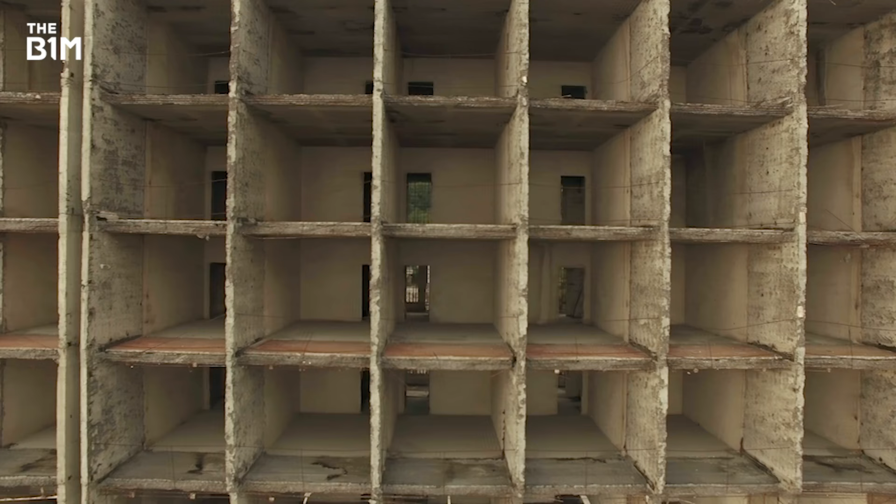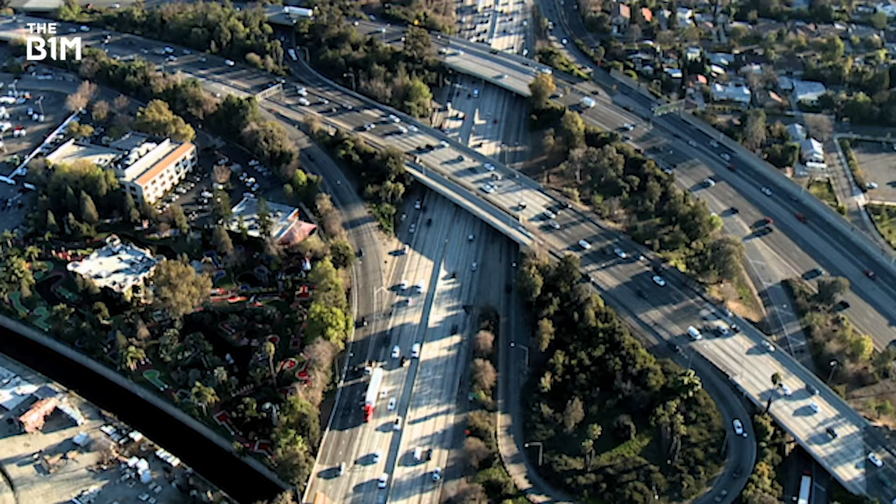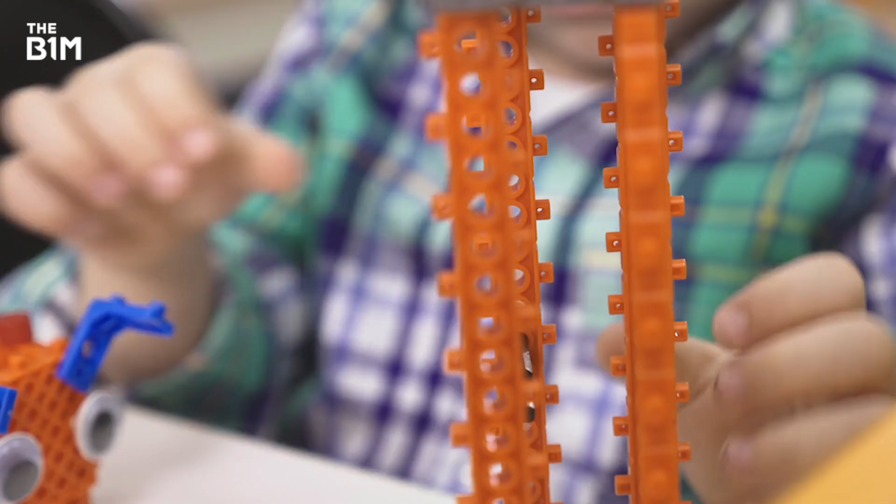The world we build impacts almost every human being on this planet. From the environments that we call home, to the way we travel, generate our energy, drive our economies, and shape our children, it is the construction sector that underpins the direction of our societies.

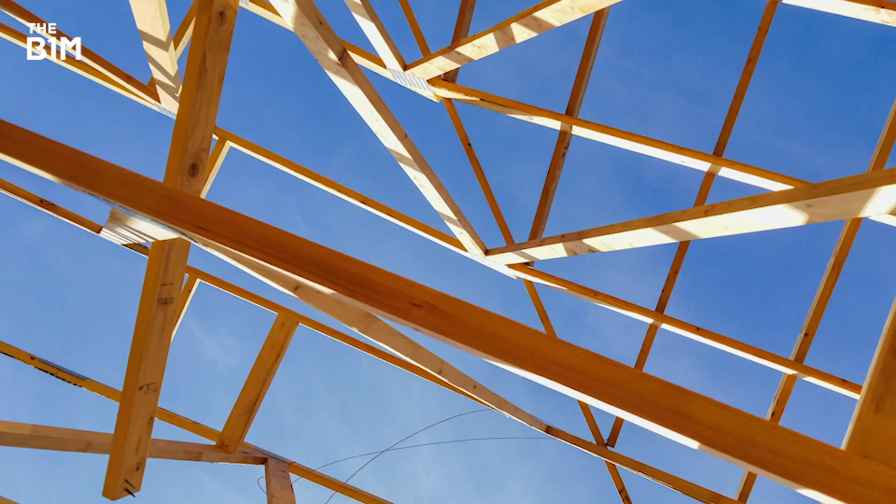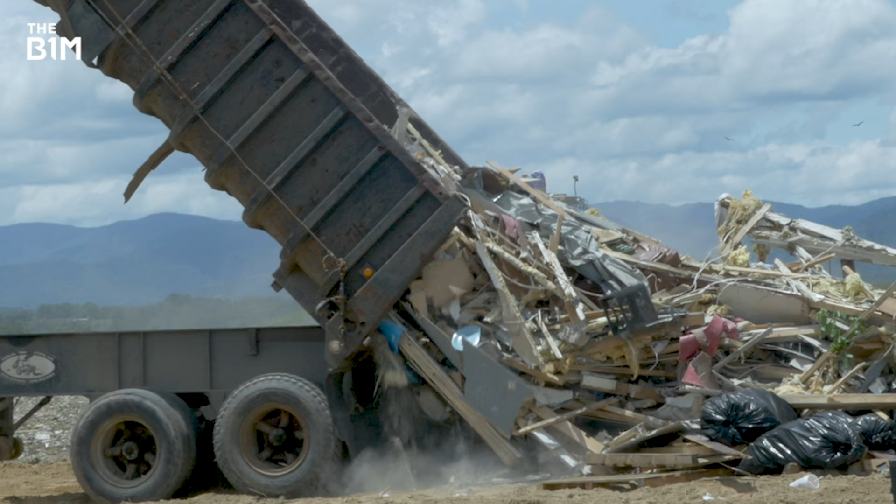But despite its fundamental impact on our way of life, our approach to construction has changed little over the ages, and we still use many of the same techniques and materials to build prototype structures in volatile outdoor environments. Now, as our planet experiences unprecedented change, the sector is embracing rapid advances in digital technologies and making a bold shift towards the world of manufacturing, merging the two to usher in a new dawn.

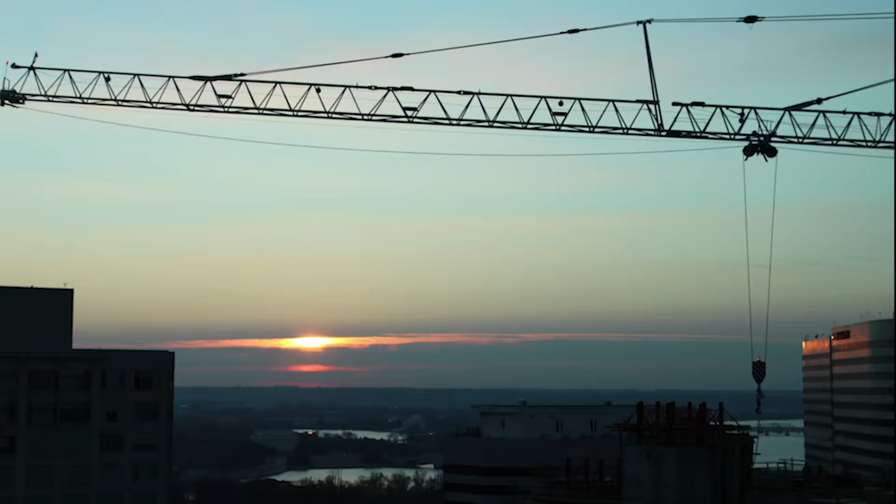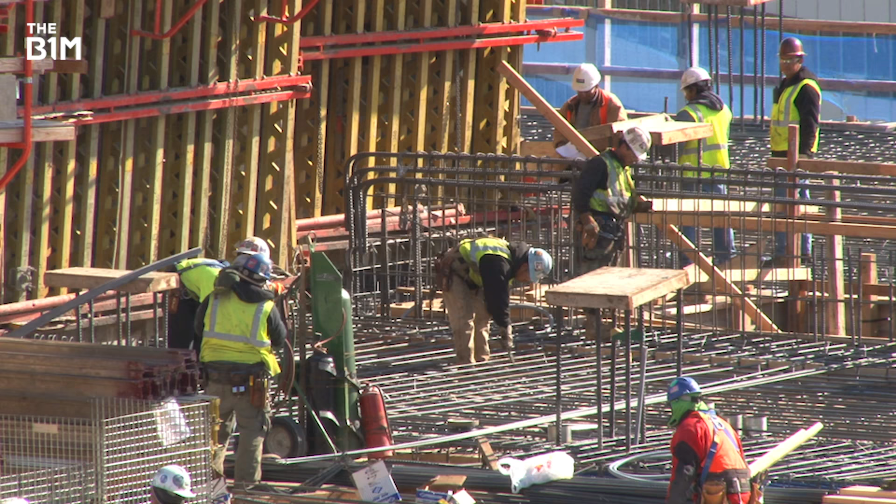For centuries, the way we construct our world has remained largely unchanged. Still using many of the same materials and processes, each project that the construction sector undertakes requires the delivery of a unique product in a unique outdoor location.

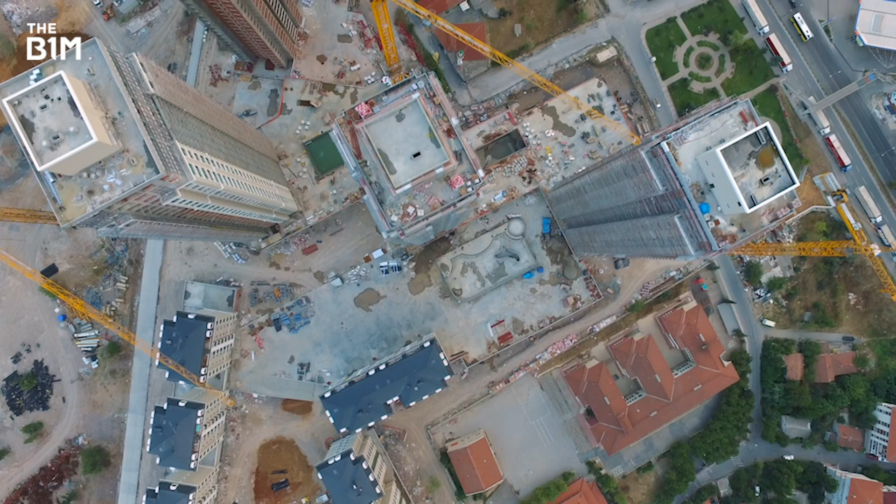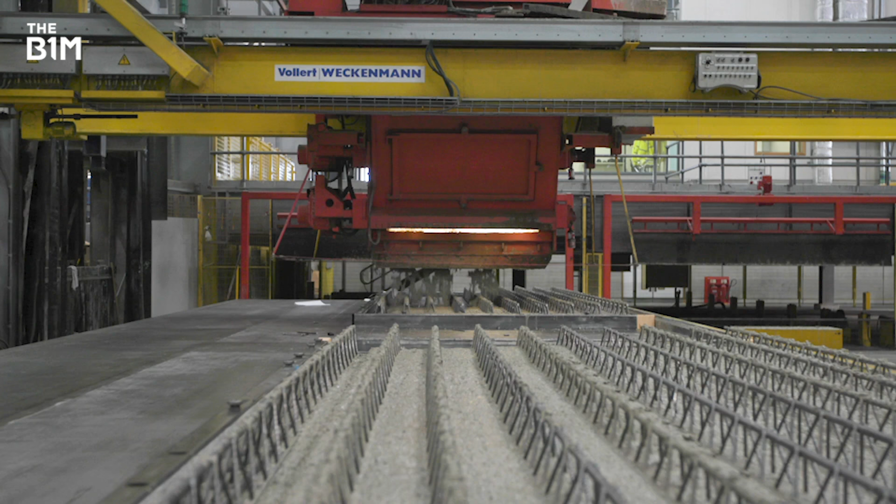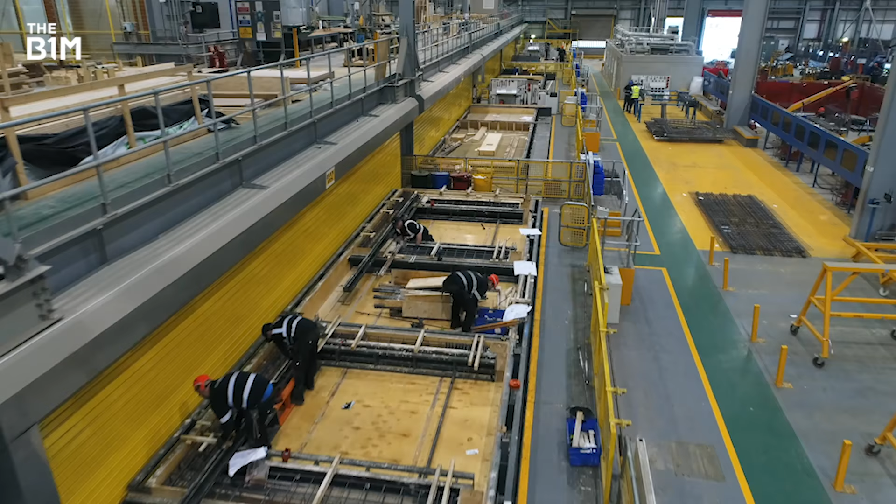Moving works away from the challenges of each site and into controlled conditions offers many benefits. Economies of scale can be achieved through automated production lines. Productivity can be significantly improved, and quality can be ensured. Such an approach also reduces the amount of time that a project is on site for, helping to lower costs, negate site-specific challenges, and to minimise disruption.

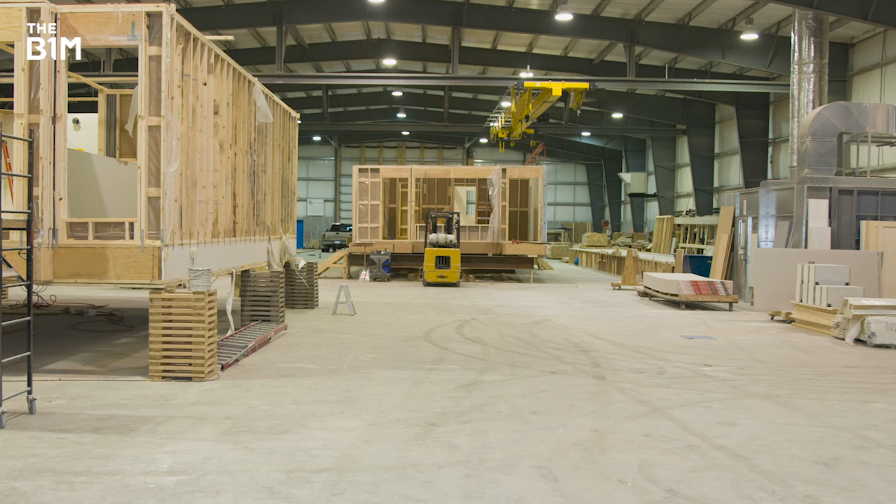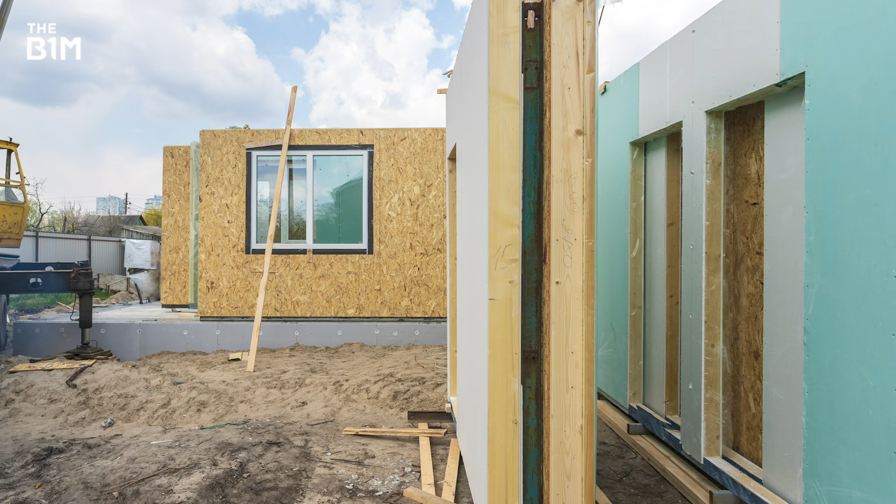The extent to which construction works are taken away from their final sites varies hugely. While volumetric solutions create entire enclosed spaces remotely and then deliver those to site for installation, non-volumetric systems are large elements of a building or structure that are prefabricated before being brought to site. On a more granular level, component-based approaches and platform systems create a kit of parts and draw from a series of predetermined items that are consistent across a number of projects.

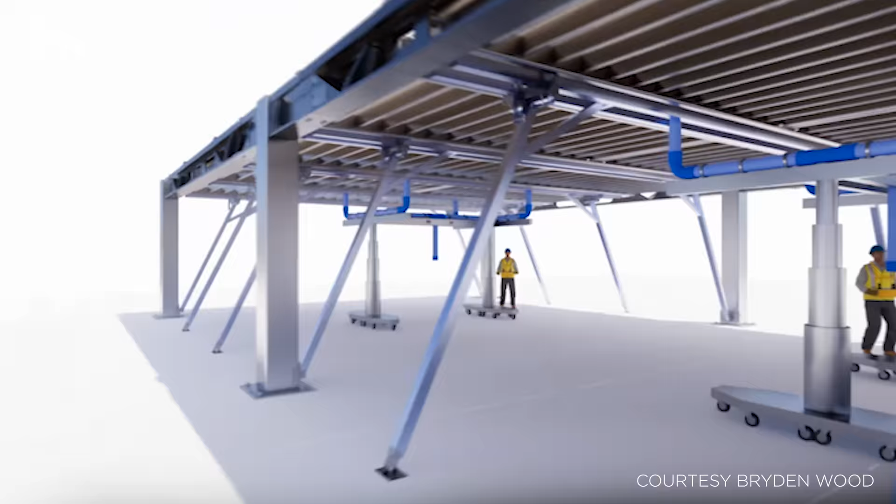Each of these off-site construction approaches offer different benefits, and each has its advantages depending on the type of project being built. However, non-volumetric and component-based approaches can retain the benefits of off-site production while offering the adaptability needed across the many different types of site that the construction industry contends with.

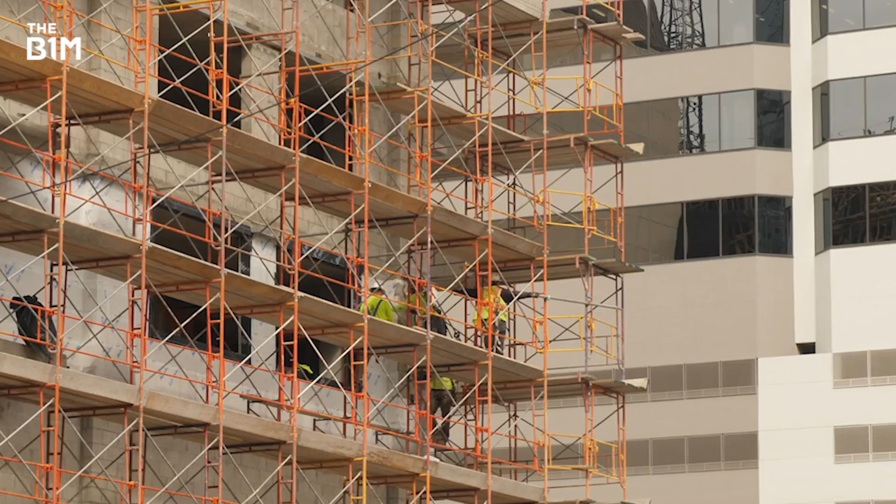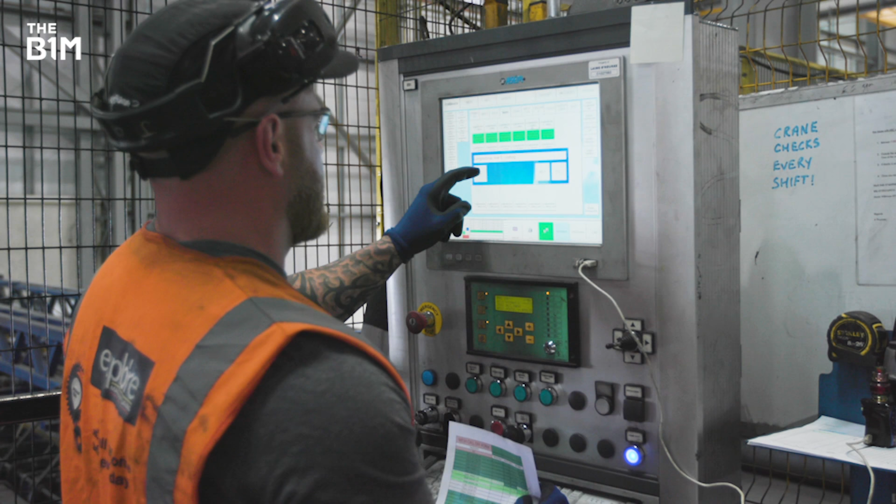But despite the seemingly compelling benefits, over several decades the concept of off-site construction has struggled to find traction. Now, with many countries facing rising populations, housing crises, and a lack of skilled people coming into their construction workforces, and with technology coming to the fore, there is renewed excitement in the concept. It is technology in particular that is helping to make the step change and overcome the long-established barriers.

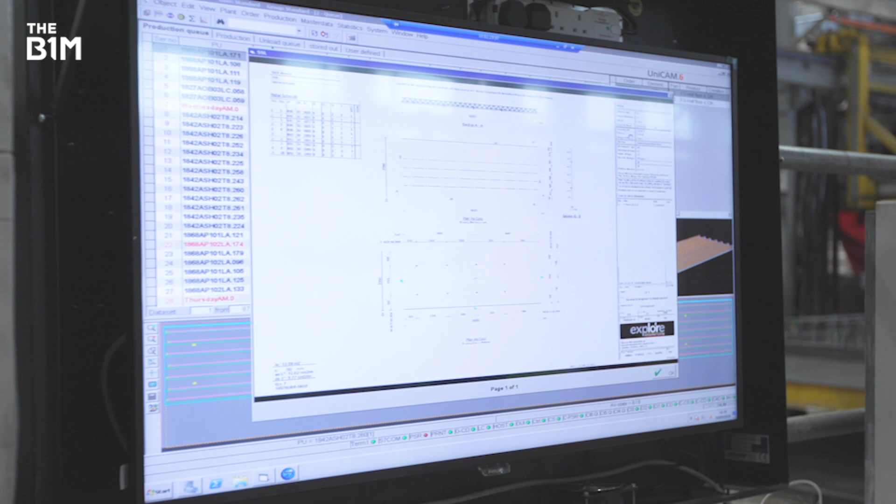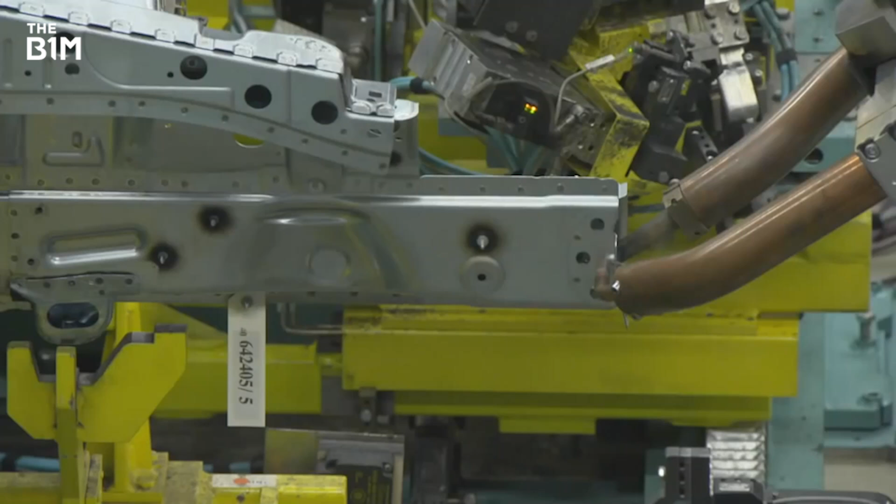The rise of automation is hugely increasing productivity on production lines, while digital design information is helping to streamline processes and increase accuracy. It is in this way that the concept of off-site construction is rapidly evolving into offsite manufacturing, a shift that sees the construction process move much closer to the approaches of the manufacturing sector and the techniques it has honed. That shift can be clearly witnessed at the UK's Explore Industrial Park.

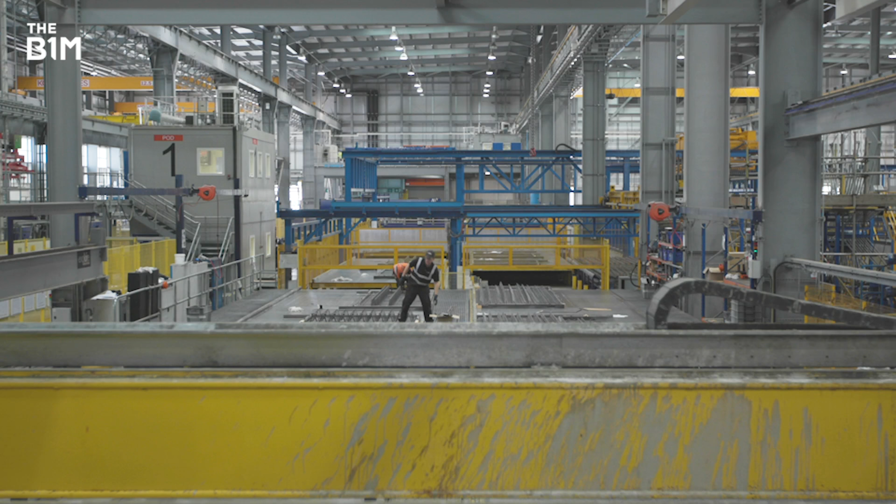Conceived and owned by Laing O'Rourke, a global general contractor with some 13,000 staff and an £8 billion pipeline, the vast factory is the most automated concrete products facility in Europe. Since opening in 2009, Explore has manufactured concrete elements for some of the UK's most impressive projects, including London's 48-storey Leadenhall skyscraper and Terminal 2 at Heathrow Airport.

Explore Industrial Park is one of the most advanced precast manufacturing facilities in Europe. It allows the Laing O'Rourke Group to control its own supply chain to a large extent. We can react quite quickly to requirements on site as a result of that. With EIP, Laing O'Rourke has managed to move 70% of its on-site manufacture to an off-site means, and that's brought a 60% increase in productivity and a 30% increase in accuracy to the delivery schedule.

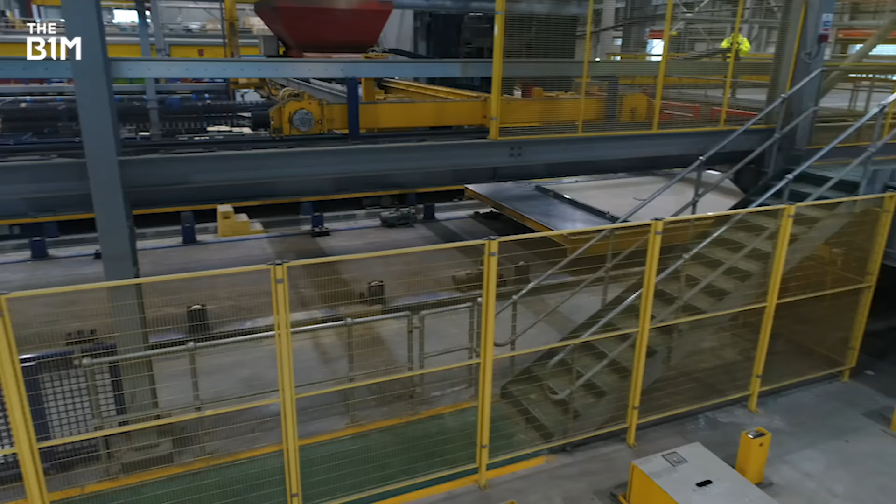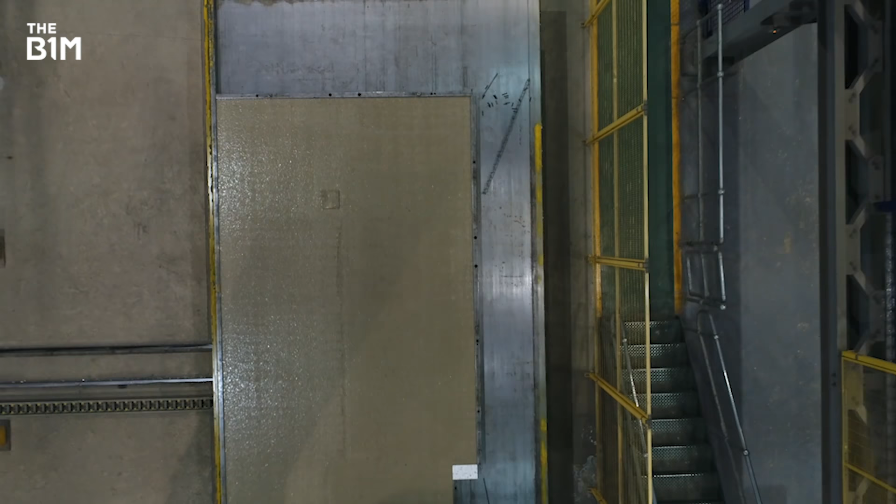What sets us apart from other precast manufacturers is our use of automation through machinery on the factory floor, also software tools that we're using. We do a lot of engineering of our processes to ensure we're as efficient as possible. Automation is very much a part of that paradigm shift, and having the right automation can eliminate most of the issues a typical design process would encounter. So your human error, your uncertainty, your factor of risk, everything else is just eliminated when you have a reliable, precise system doing it for you.

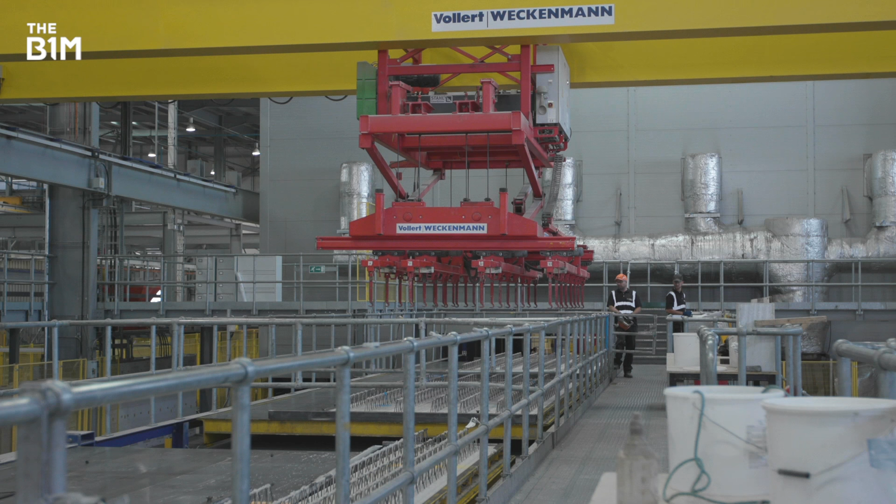Throughout the last 10 years, Explore Industrial Park has continually evolved and innovated, embracing automation and digital technologies as they have matured. Repetition, honed processes, quality control, and a consistent flow of work are all key to the facility's success. In this context, it is critical that the design information shared with the production teams that is used to cast and form concrete components is accurate.

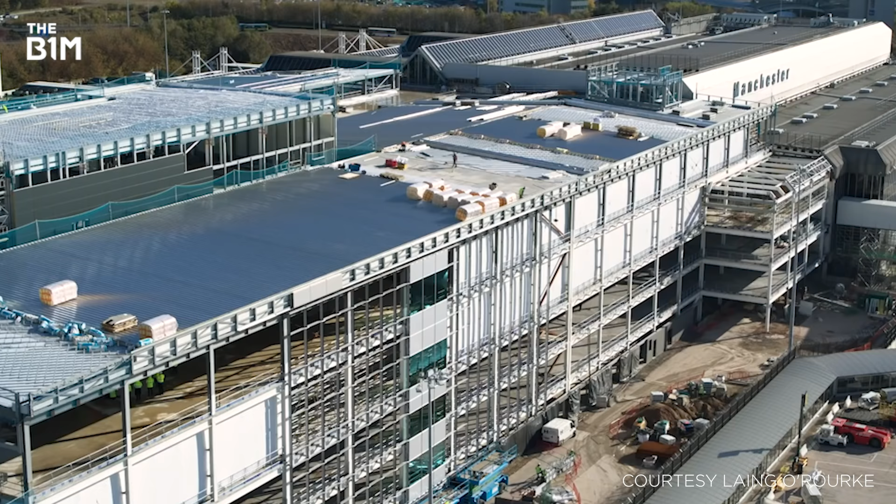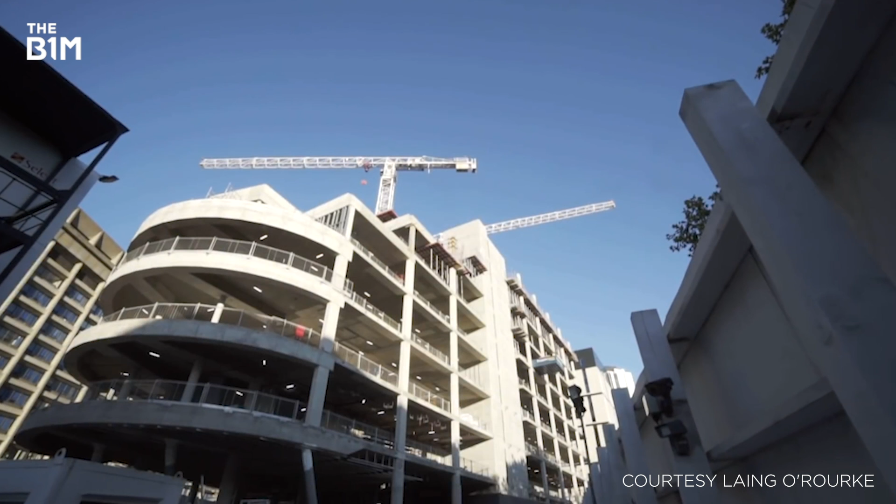For major projects like Manchester Airport's transformation programme and Liverpool's new specialist cancer hospital, both of which are currently moving through the factory, the importance of accurate digital data could not be more acute. Errors in production can slow the overall progress of projects, affect other activities out on the construction site, and mess up the factory's work schedule, costing time and money.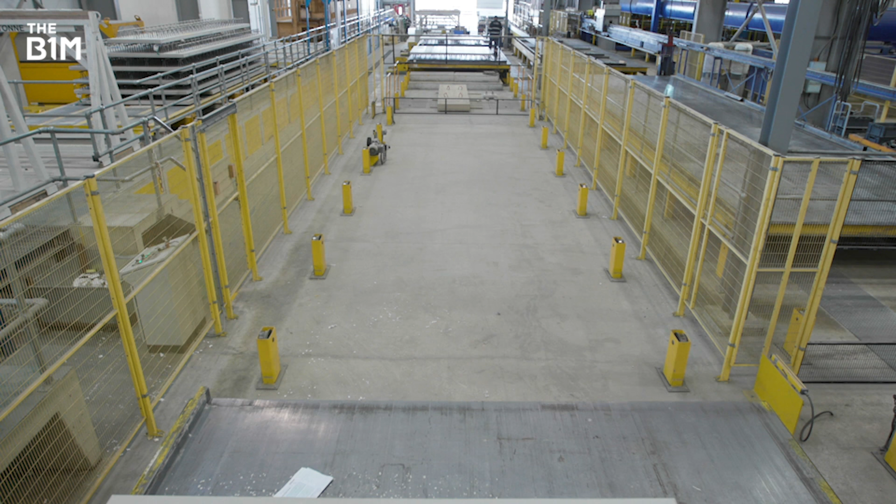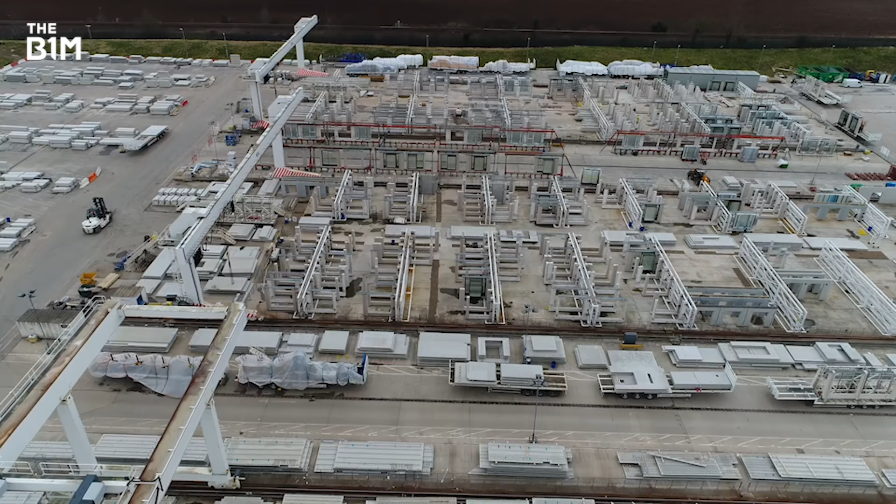Because we're at the point where things are cast in concrete, as they would say, it's quite important that we assess every single facet of the design. From a project landing at Explore, we would meet with the site team, the clients, architects and structural engineering consultancies, as well as interfacing disciplines. We'd go through the product set, look for similarities between different component types, and we'd try to rationalise them. This allows us to achieve a level of standardisation across a project.

We take the concept that the architects and the engineers want to enforce and bring that to reality. So we have to think about how manufacturable it is, how handleable it is, and how viable it is for the build. A typical manufacturer would generally produce one product type in one precast factory. This precast factory, we produce multiple, so we can supply all the precast on the project. That allows a certain level of coordination between the different product sets.

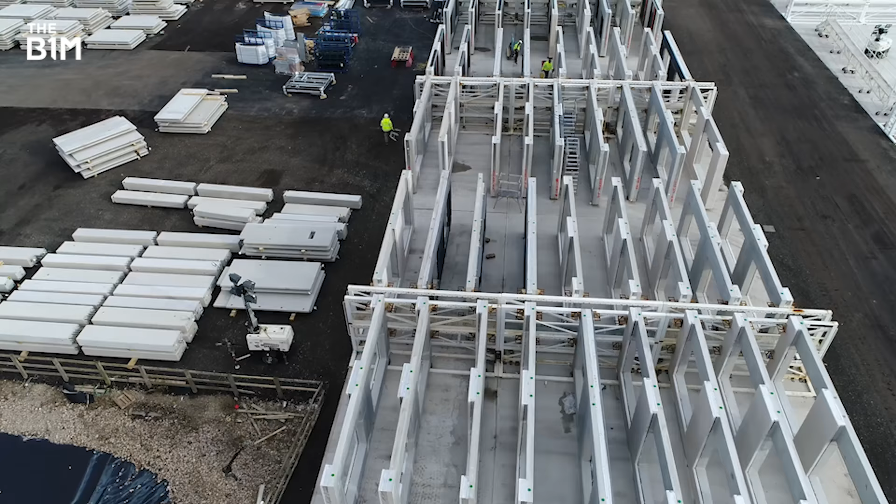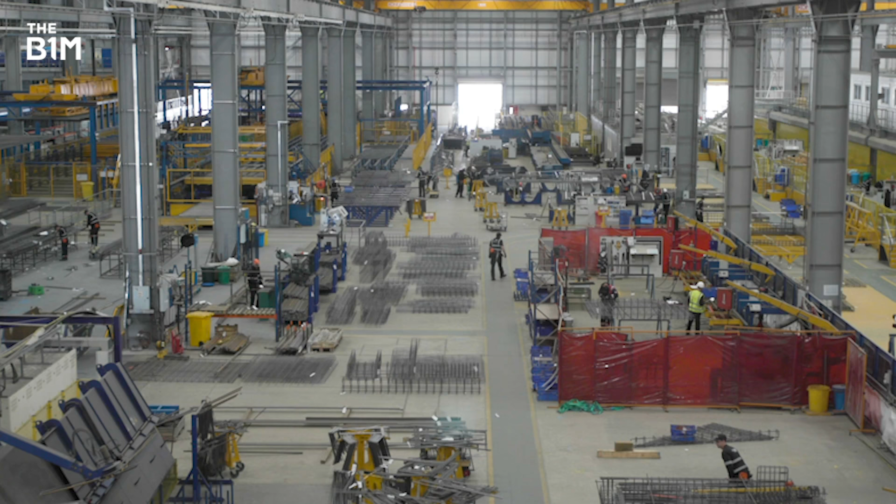Other things that set us apart are the complexity of the products that we're willing to manufacture. Traditionally, precast concrete, it's fairly simple geometries. We do a lot of architectural product here at Explore that you might not find elsewhere. From the outset of a project, Laing O'Rourke's teams consider which elements could be fabricated away from the construction site. Working within the broad parameters of what the factory can achieve, they then develop detailed design information models to inform both the construction and operation process and the manufacturing of components.

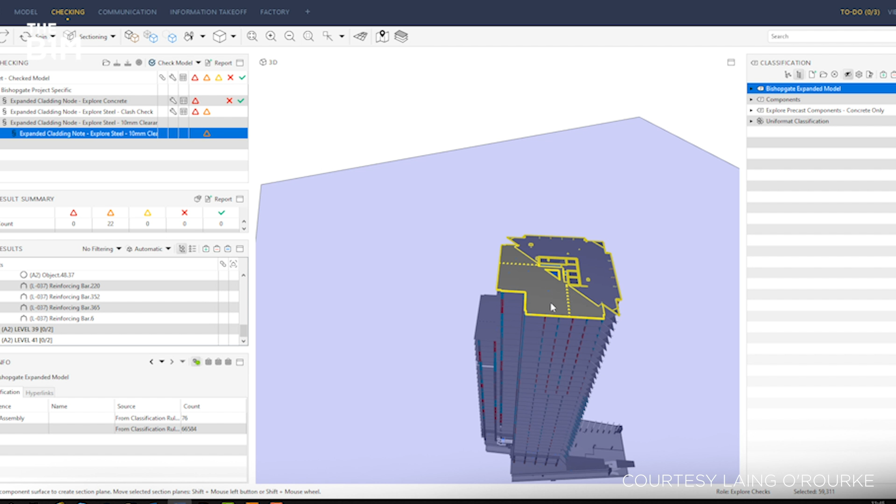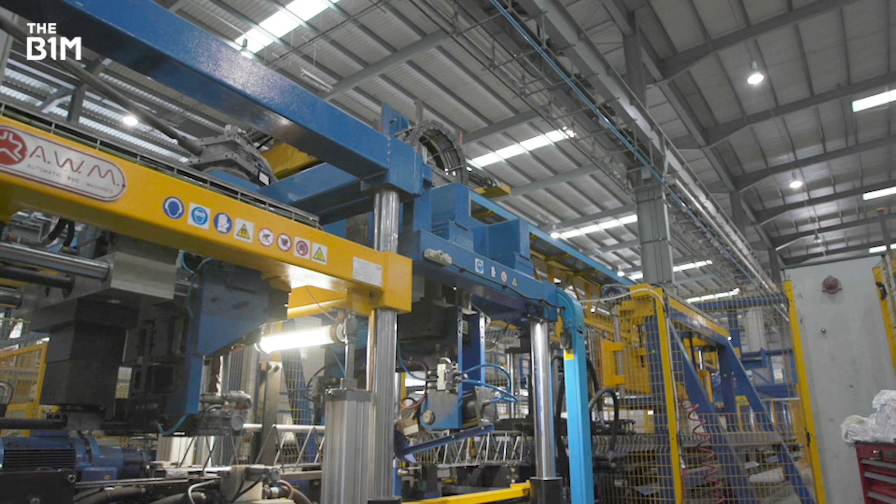To ensure the accuracy of their digital information, the team use Solibri Office to validate its contents. Pulling information from various different members of the design team into a single combined or federated information model in Solibri, the tool can then be used to check the quality of that data, communicate any issues, enable quantity takeoff, and classify components. With their design information quality checked, the team then issue digital production information directly to the factory floor, where the process of component manufacture begins.

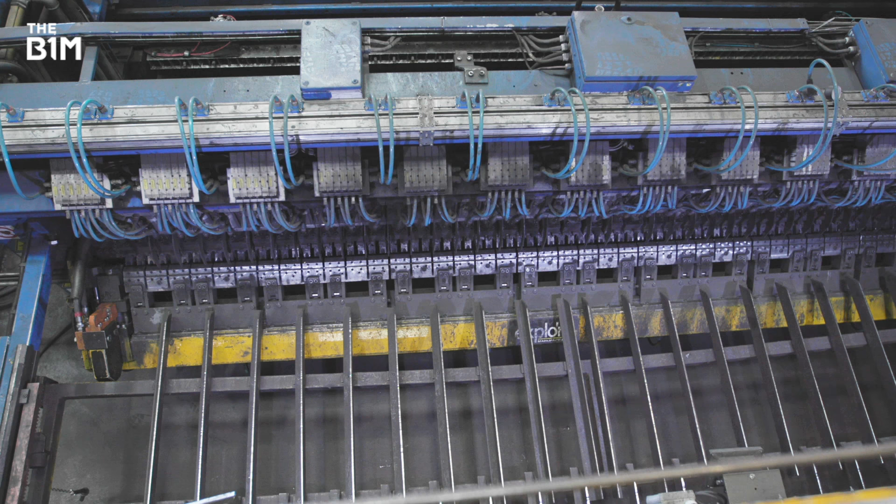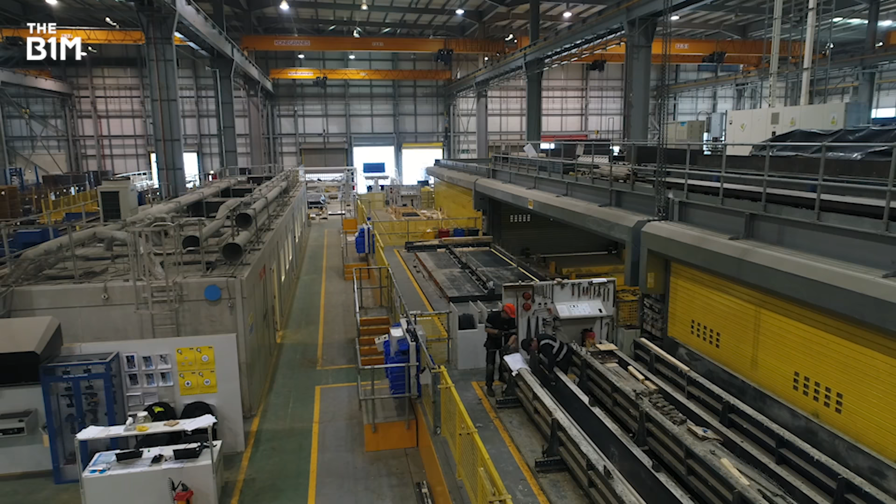From the cutting and fabrication of steel reinforcement cages, including placement of the ties, to the distribution of concrete across the factory, the pouring of that concrete, and the process of curing it, Laing O'Rourke's manufacturing process is highly automated, helping projects delivered through Explore to take significant strides in productivity. Once produced, the building elements are loaded onto vehicles, taking into account the order that they will need to be unloaded in, and are transported to their sites.

Those on the ground in the project's location are able to seamlessly engage with and see the data about their scheme through tools like Solibri Anywhere, which enables access by any member of a project team wherever they may be, and Solibri Site, specifically tailored to those working in the field. The geographic positioning of Explore in the very centre of the UK is deliberate, and the factory has created components for sites in both the south of England and in Scotland. From the outset of the design process, right through manufacturing to the delivery and installation of components on site, and the operation of the built asset afterwards, the entire process is informed by digital data.

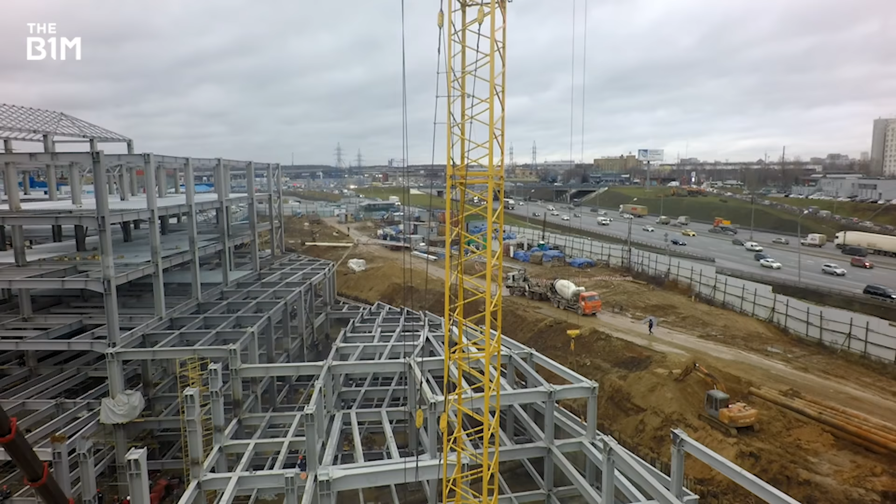The success of such projects is therefore dependent on the quality of the data used, and the idea of not quality checking or validating it seems very risky. If something's inaccurate, it can not only be at the detriment of your product and your quality and your safety, but it's immediately visible in your coordination checks. I mean, as a species, we're quite a visual species, so now that we're doing everything in 3D, it needs to be spot on or you will know about it.

One of the things that we use Solibri for primarily is checking the quality of the incoming information. So prior to us receiving information at Explore, we provide the consulting engineers or architects with a library of standard objects, produce a BIM object library. We then pass that back to the consulting engineers. They populate their model and then provide us that information.

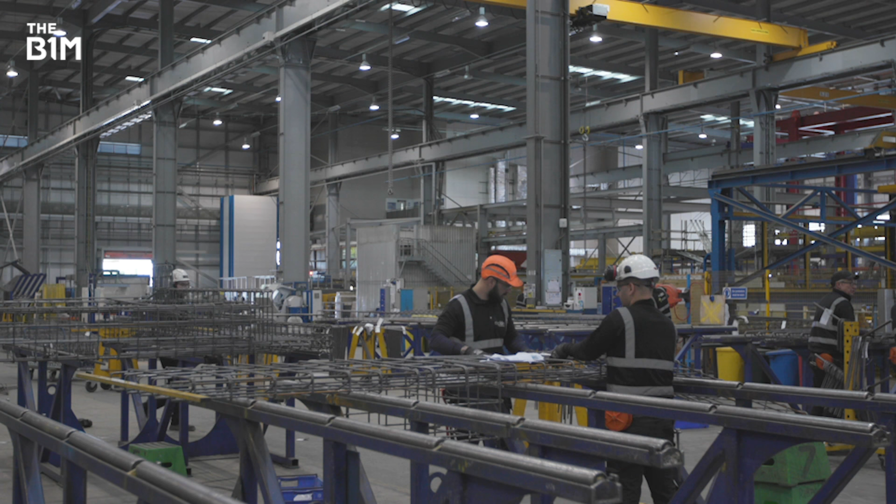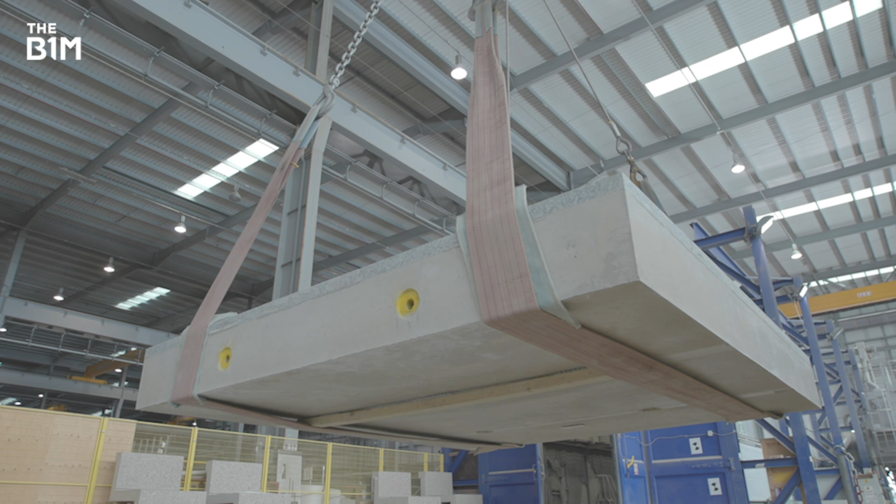We'd also do checks between the different precast elements for construction joints to make sure that's as per the agreed details. You're able to streamline the design in the best way possible and ensure that everything works before it's tangible in any way, shape or form. So for us, it's very key that we get the models and all our theoretical understanding of the entire structure spot on before it gets anywhere near the floor or sites.

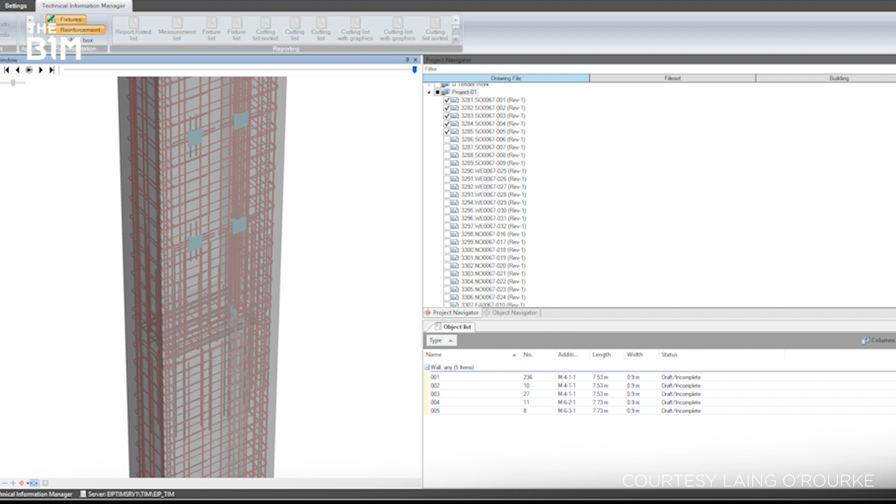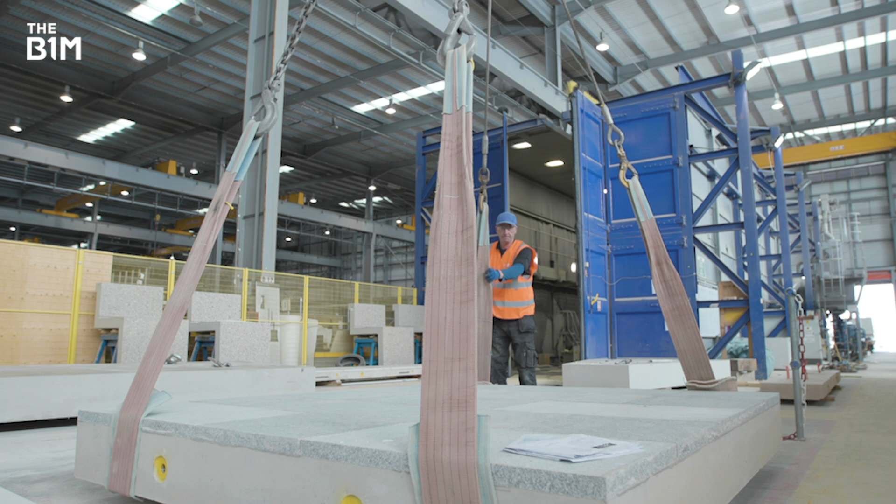Once all the issues have been closed out, then we would transfer the model through into our precast RC detailing platform. We add more detail to the models. We'd be adding information such as casting fixtures, reinforcing bars, basically to get a digital model as to what we're trying to produce actually out in the factory. Having a safe system that is able to carry out these checks for us, it eliminates the possibility of human error and uncertainty, giving us a much better outcome in the way that the product is built.

Information not being right has impacts to every single facet of the system. Because if you think about not just the safety and economy of the whole thing, it's the environmental impact as well. So to move 6 tons of concrete all the way down to a project, let's say in London or up in Edinburgh, and to have it wrong on site wastes a lot of time and money. So it's always key that we get it right the first time.

Explore Industrial Park effectively sees two of construction's most disruptive new innovations come together under one roof: offsite manufacturing, enabled and further advanced by digital technology. Run on digital data, Laing O'Rourke's use of Solibri during design, manufacture and final assembly is key to ensuring the process runs smoothly, underpinning the success of countless projects. Indeed, as our world becomes ever more dependent on data, ensuring the accuracy of that data so that it can serve us in the best ways possible is critical.

It's about having controlled conditions, controlled quality, precision, all of the good things you get from a factory setting that you may not ideally have the ability to implement on site. There's quite a lot of complexity in the systems that we have based at EIP. As a factory, we look at ourselves as any other factory, the same way an automotive factory would look at the way they manufacture things.

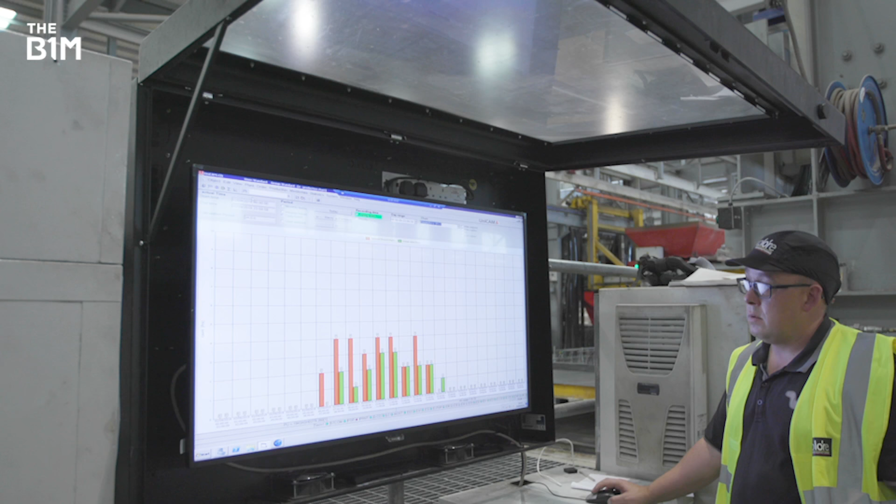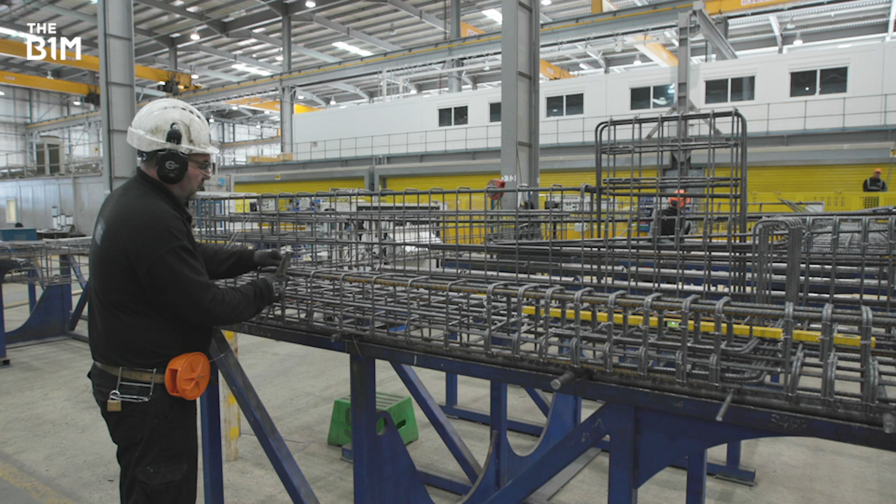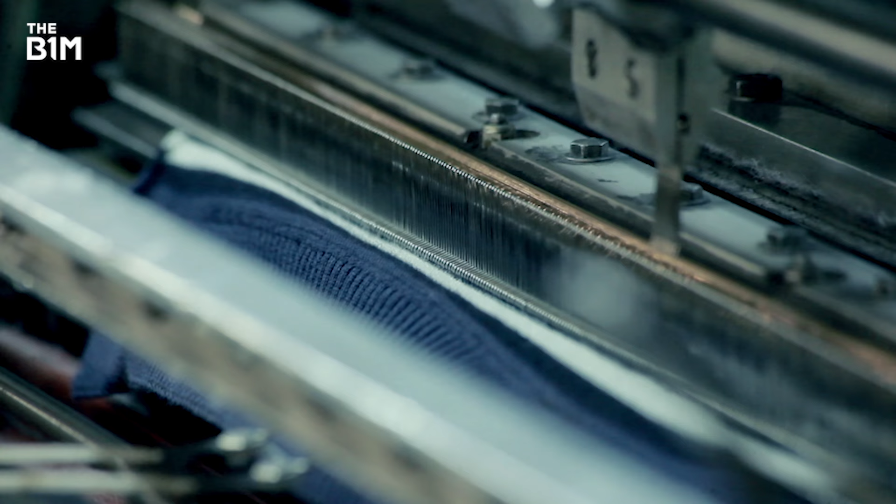The approaches employed at Explore Industrial Park that can offer improvements in productivity of 60% could be the answer to making a step change in overall performance across the wider industry. With others now following suit, and with the trend gaining in momentum across the sector worldwide, combining the power of digital technologies with the approaches that have made manufacturing so successful is seemingly ushering in a digital manufacturing revolution in construction that could transform the built world, shaping all of our lives.